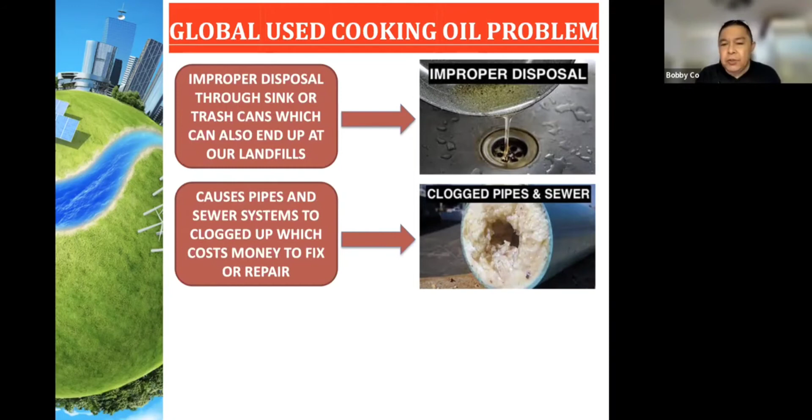If you notice in the Philippines, when the weather's cold, like December, January, and February, and if it's raining, you'll see some parts of Metro Manila flooded. We always think that's because of trash, but it's not only the trash - it's also the oil that's being dumped. When the weather's cold, it freezes up, and when it gets hot, it melts again, and then it goes into the oceans, rivers, or lakes like Laguna de Bay or Manila Bay in Roxas Boulevard.

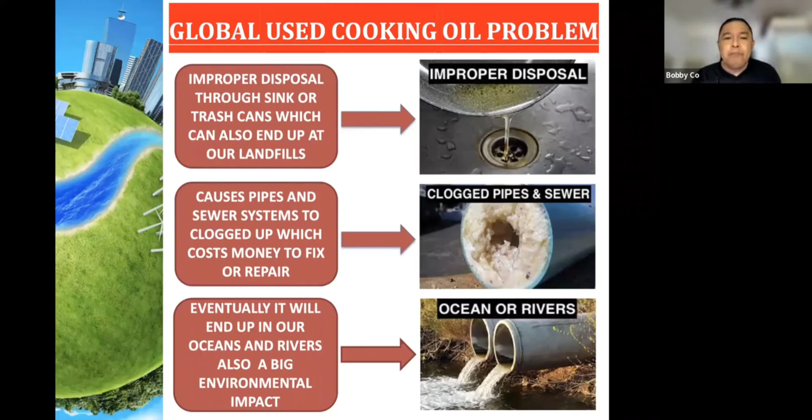There's actually a law in the Philippines, Republic Act 6969, which prohibits dumping used cooking oil into the sink or anywhere. It's considered a toxic substance, hazardous waste - it even falls under nuclear waste level. It's an act about toxic substances and hazardous waste, basically nuclear waste.

And it's very illegal in 86 countries to recycle used cooking oil back into the food chain. Here in the Philippines, sir, what they do is sometimes they buy it - on the next slide you will see - they buy it from restaurants, and what they do is recycle it using cheesecloth, and then sell it out, which is actually very illegal.

What do you mean, they filter it? Is that what you're saying? They filter it, sir, they filter it. Sir, can you just give me one minute? I just have to instruct someone real quick. Just one minute, sir, I'm sorry. No problem.

ITC. Charles, hi. Hi, Sue, how are you? I'm okay, I'm sorry - actually I thought he was, okay, he's back. All right, sorry, I just had to give someone an instruction. I actually had a meeting, but I canceled it, so just to make sure.

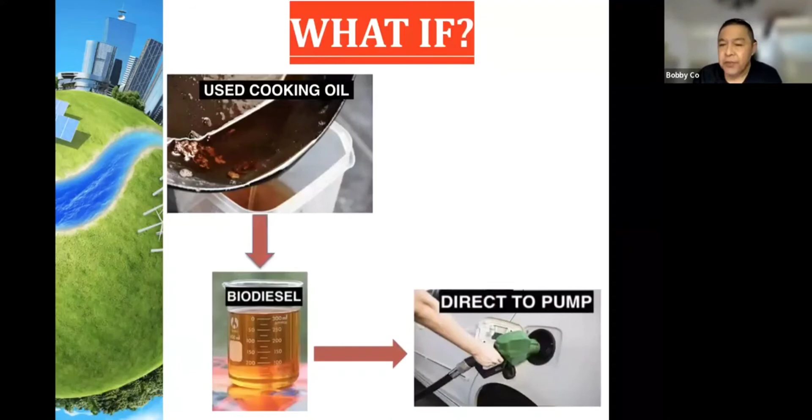So we saw this, sir, and this is actually illegal—very illegal. The owners of this could get fined, they can go to prison, and they can also get their business shut down. So what if we can turn the used cooking oil into biodiesel? We convert it into biodiesel, turning waste oil into renewable, sustainable energy so we can be less dependent on fossil fuel.

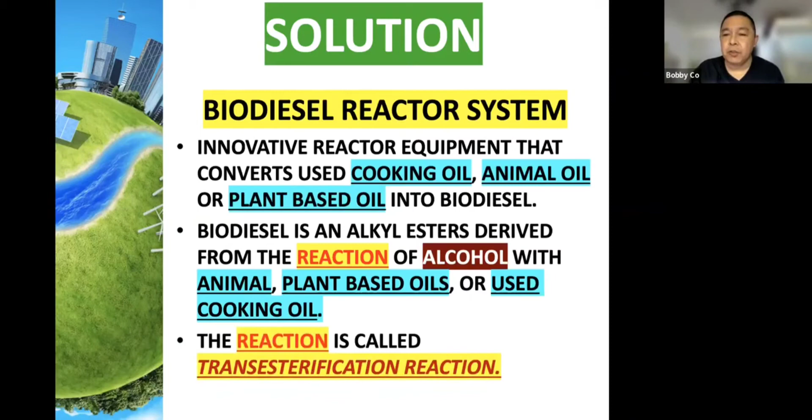The solution is we have what we call a biodiesel reactor system—an innovative reactor equipment that can convert cooking oil, whether animal-based or plant-based. Biodiesel is an alkyl ester derived from a reaction of alcohol and other chemical materials. Once combined, the reaction is called transesterification. It's a process achieved by providing the correct reactants and materials, with proper conditions such as humidity, room temperature not reaching a boiling point, and heating temperature. It will react, then a catalyst or binder is added, and we can convert it into biodiesel. Almost all animal or plant-based oil can be converted into biodiesel.

In fact, if someone has a liposuction, human fats can also be turned into biodiesel as long as it has triglycerides.

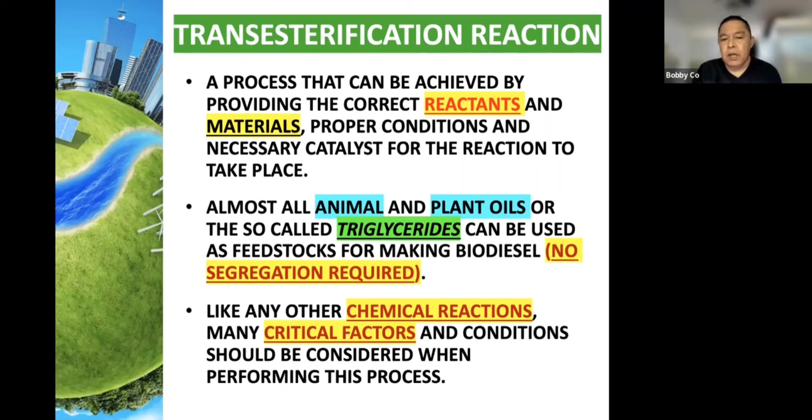Just like any chemical reaction, there are critical factors we have to follow. Number one is the safety of the employee, safety of our warehouse, and safety for the project. We have already taken into consideration the safety sprinkler system and all of that, as well as the training of the employees.

When we talk about feedstocks, these are the raw materials we can use to convert into biodiesel, which can help the farmers. One is tallow oil, canola oil, rapeseed, jatropha, and coconut oil. Coconut oil is abundant in the Philippines, but unfortunately it's expensive, because our farmers here would rather export it to the UK and Europe, since they get euros and pounds rather than pesos. So if you were to buy coconut oil here in the Philippines, it's really expensive.

Palm oil, avocado oil, peanut oil, sunflower, castor—all of these can be converted into biodiesel. Talahib, if you're familiar with it, is the wild grass, the tall wild grass you'd see out there—we call it cogon grass. There's a process I do to extract the oil from it and turn that into biodiesel. Fish oil too—if there's any fish ponds with fish kills, fish dying, we can convert that into biodiesel. Likewise with the canning of sardines, the one who manufactures and cans the sardines, and also hemp.

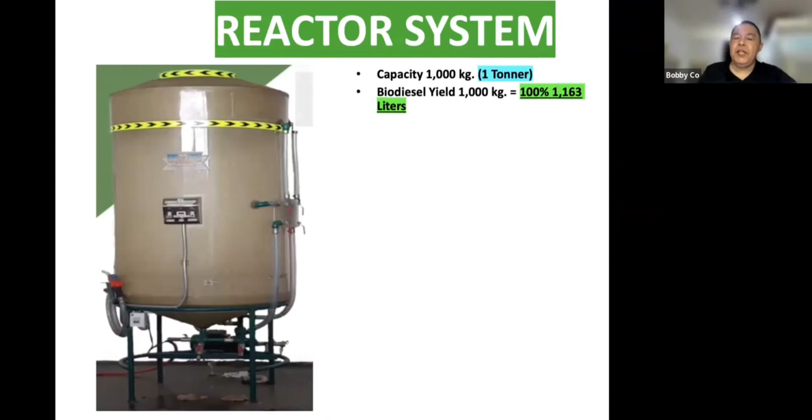That's already available. This is the reactor system that we have, sir. The capacity of this is 1,000 kilograms, or one tonner. The density is 1,163 liters for 1,000 kilograms. The yield—if you were to put 1,000 liters into this reactor, after the conversion process, our result is still 1,000 liters. There's no evaporation; in fact, we gain more on this one, and I'll show you what other byproducts come out of this. The reaction time is between 30 minutes to 1 hour.

The reason why I'm telling you all this, sir, is for your knowledge. And if you want to get into something, at least you know what kind of business or how the process works. We have data to prove here, sir.

This is not a drawing, there's already existing equipment. It is not ours, but it has already been used there for the last 10 years. The advantage we have is we're commercializing it, they're not, they're just using it for themselves. Like the Jam Bus Liner in Laguna, the Tapa King restaurants, Our Lapid's restaurants, there's a lot of companies, even local government units, but they're only using it for themselves, not for commercialization, while this project is concentrated on doing it commercially.

Reaction time, sir, means the conversion time. So 30 minutes if we're using animal-based oil, which is lard, and 40 minutes to 1 hour if we're using plant-based oil.

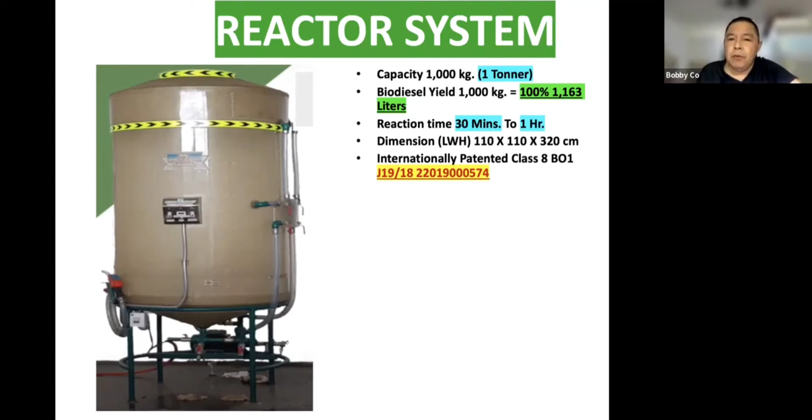This is the dimension, and also we are internationally patented, Class 8. So we have expansion also in the US, hopefully by the end of this year or first of next year. It's very safe and easy to operate, very end user friendly.

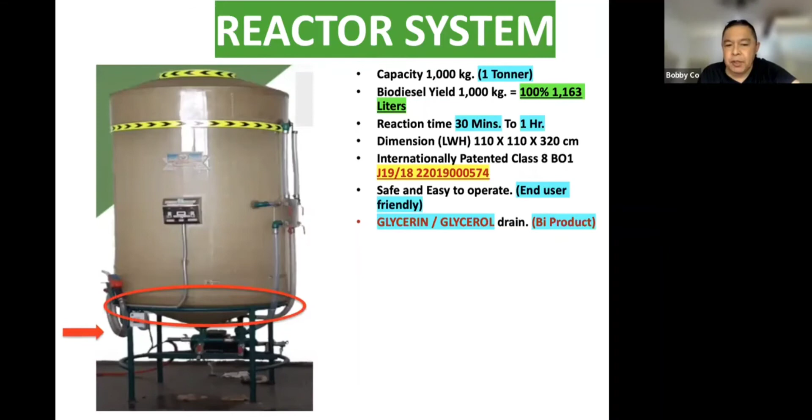The unique thing about this reactor, sir, is we have a glycerin glycerol drain in the bottom, right here. That's where the glycerin comes out after we've done the conversion. That is an extra byproduct that we get out of that.

We are also unique because of our valve and the separation process from the sediment to the biodiesel. In other equipment, sir, the reaction time takes 3 days to process 1,000 liters. Why? They still use water to wash it down, so it takes them 3 days to separate. Then for them to unload it from their equipment, it takes almost 3 hours, versus us, it takes only less than a minute to unload the byproduct. That is what is unique about ours.

We only use a 2 horsepower pump baffled to create vortex and eddy current. To top that off, we do have heating, but not to a boiling point temperature, to make it fast and efficient.

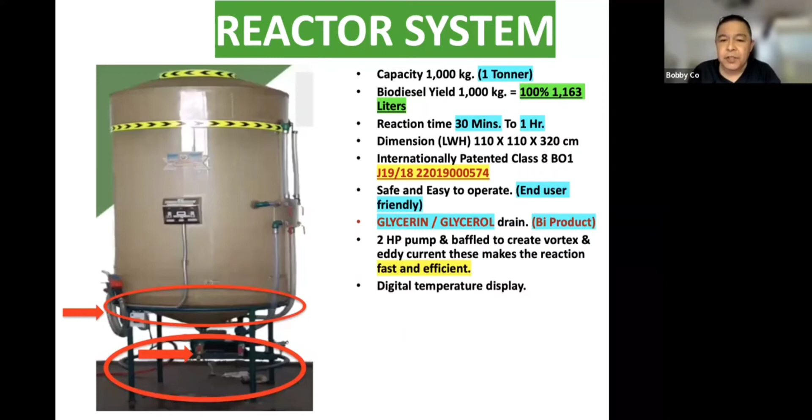There's also an eye-level central control panel. If you're a co-owner or co-partner with us, we give you an application on your phone. You'll have remote accessibility 24 hours, 7 days a week, live feed, which means you can actually see what's going on manufacturing-wise, processing-wise, conversion-wise, how much used cooking oil comes in, how much biodiesel results go out on a daily basis. So you're able to track it down, and you'll have a dashboard report every day.

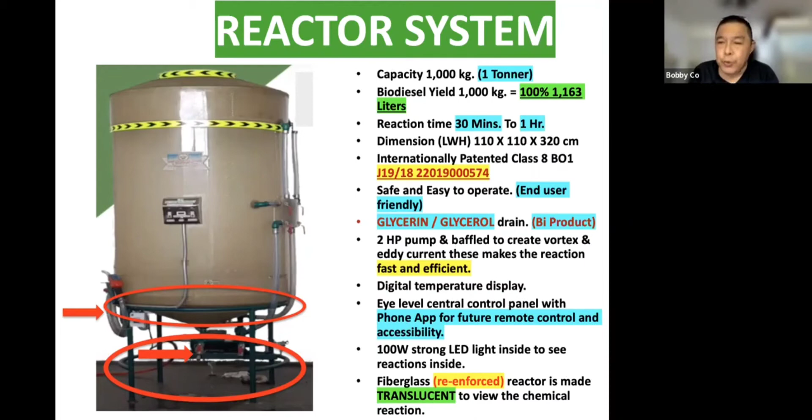We use a 100-watt strong LED light so we can see the reaction inside. We use fiberglass reinforced material so we can really see everything, and it's durable, it's reinforced, and it's also translucent so we can actually see the reaction time inside.

We do have 2 byproducts, sir. One is carbon credits, but I'd like to stop here real quick. These two byproducts, I will not include in the net profit or in the feasibility study on a monthly basis, I will not include it. This is separate, this is actually a bonus for us.

One is carbon credits. As we all know, manufacturing companies have a quota each year. Once they hit that quota, they either have to shut down the company and stop emitting pollution, or pay a fine daily while operational. The last option is they have to buy carbon credits from a group or organization that produces 100% renewable energy, because that organization gets carbon credits for it. So this carbon credit is bought by the manufacturer to offset their pollution, so they can continue operating and continue doing their pollution, to offset that.

To give you an idea, for 1 metric ton, basically, if you're familiar with North EDSA to Makati, that's about 200 cars or jeeps. If you're able to come in with a carbon credit, that's basically what you'll be saving.

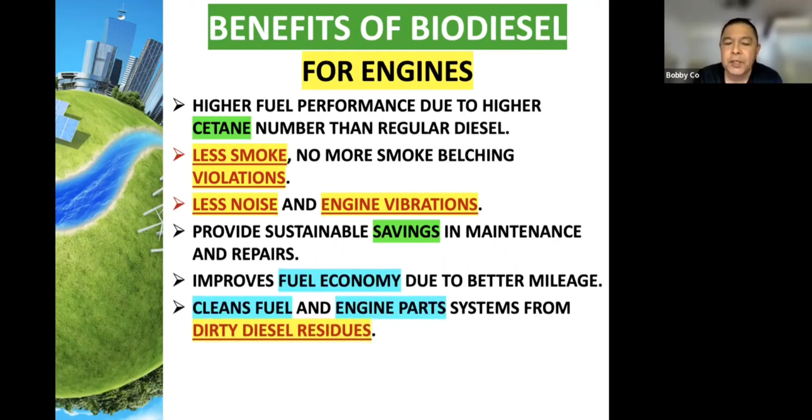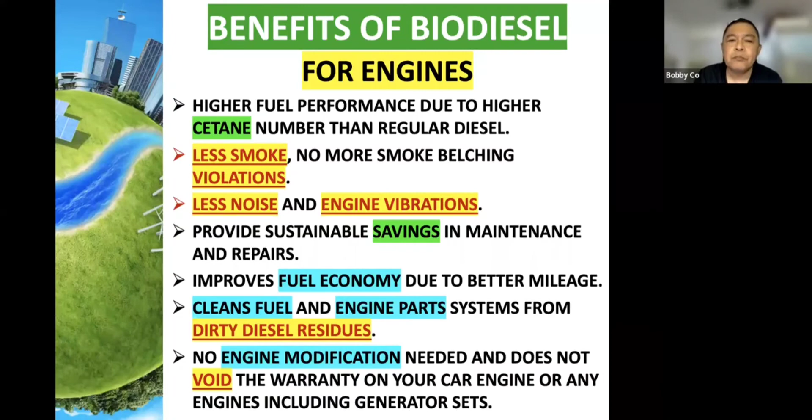It improves your fuel economy due to better mileage. It also cleans fuel and engine parts, and there's no engine modification, sir. That means we don't have to remove or add any parts to your car, and it does not void the warranty. In reality, sir, it's an advantage for the manufacturer or car dealer that they use biodiesel, it makes the engine last longer. This is what I'm talking about, the performance, sir — engine performance, mileage, and savings.

If you look to your left, sir, the cetane rating you buy right now is about 44% at the gas stations, and that gives you mileage of about 10 to 12 kilometers per liter. If you process coconut oil into biodiesel, it gives you about a 75% rating, increasing your mileage by about 50%. So we're looking at an average of 15.1 kilometers per liter.

But if you use animal oil or lard, which is what 90% of places like Jollibee, McDonald's, and restaurants use, it increases your cetane level to 92% and the mileage to about 18.2 kilometers per liter — almost double.

If you can find a gas station, sir, that sells 100% biodiesel — right now if regular diesel is at 50 pesos, pure biodiesel is about 56 pesos per liter. Why? Because it's almost double your mileage in this case, it has more burning power and it's much cleaner. So that's the benefit of the mileage and savings.

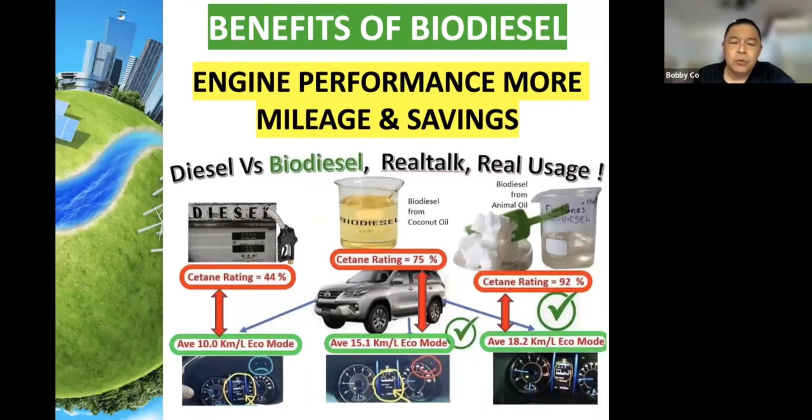One, it cleans the engine. Two, it increases your mileage as well. This one also, sir, broke the world Guinness Book of Land Speed Record at 182 miles per hour, not kilometers. So it's really faster and more powerful. That's why I mentioned construction companies, mining companies, and fishing boats or vessels — construction companies really want a higher cetane level on their equipment because it needs more power. That's why we can sell it to construction; whoever has construction equipment, especially in mining, can pay a much higher price for that.

For health and environment, it's zero sulfur emissions, very low CO2, CO particulates, or other pollutants. As we all know, those cars, like in EDSA or the jeeps, the smoke coming out, sir, is about 20% unburned fuel, so it's very dangerous — the levels right now are really high. It's also biodegradable, sustainable, clean, and a renewable project, sir — a non-toxic fuel. We can help reduce global warming and climate change. In a small way, we can help the environment too. It burns cleaner than your regular diesel, sir.

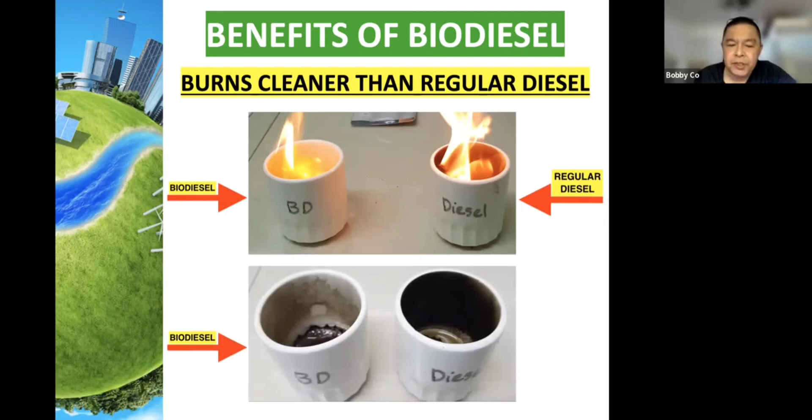You can see it from the left, it's BD, biodiesel, and to your right is the diesel, sir. You can see how dark the one to your right is. After the burning, this is how the biodiesel looks like, and to your right, this is the regular diesel.

It has higher combustibility. Diesel, as we know, doesn't burn like that on its own. You need a piece of paper or cloth, dip it, and when you light it, only then it will light. Versus here, you can just spray it and put a lighter to it, it will combust.

Our main market, sir, is nationwide target. In the Philippines, there's 146 cities, 33 of which are highly urbanized. We're planning to put a minimum of 2 units per city. Total projected units is 292, which is 146 times 2, nationwide in the Philippines.

Our target market also for collection of used cooking oil would be your restaurants, your fast food chains such as Jollibee, McDonald's, hotels, resorts, food manufacturing like Unilever, commissaries like Wendy's commissary in Marikina. They do about almost 10,000 liters per day because they have the sandwich called Baconator. What they do is pre-cook it at the commissary before sending it out to their stores, so they have tons of used cooking oil that we can also pick up. There's also canteens, carinderias, food concessionaires, apartment buildings, and condominiums.